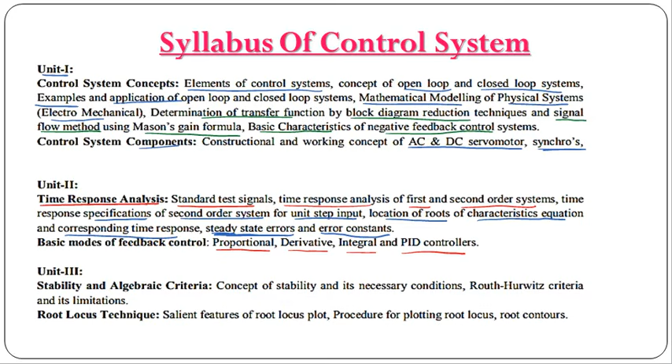And in Unit 3, we will discuss stability and algebraic criteria. So we will see the concept of stability and the necessary conditions. Then we will discuss RH criteria, that is Routh-Hurwitz criteria, and its limitations.

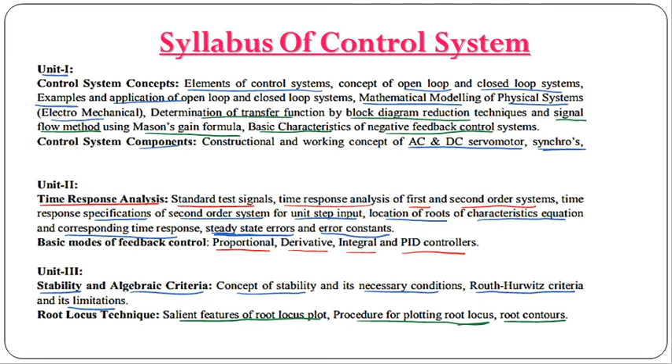And in the B part, we will discuss root locus technique, and we will see some salient features of the root locus plot and the procedure for plotting the root locus, and also discuss root contour. Then in Unit 4 we will see frequency response analysis.

So we will discuss the frequency response analysis from the transfer function model, and we will see the construction of polar and inverse polar plots.

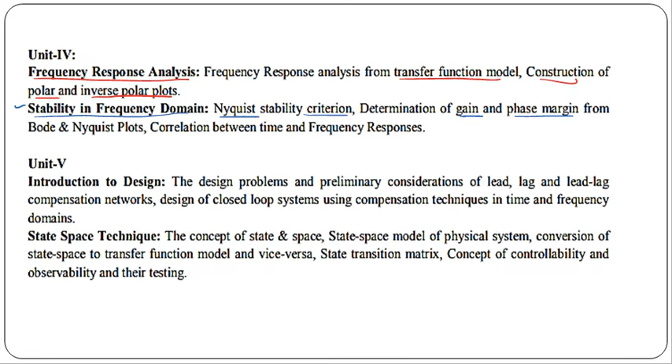And in the B part we will see the stability in the frequency domain. Here we will discuss Nyquist criteria, and we will discuss the gain margin and phase margin calculation from the Bode and Nyquist plot, and also see the relation between the time and frequency response.

And lastly, in Unit 5, we will see some design problems of lead, lag and lead-lag compensation network, and we will design the closed loop system using the compensation technique in the time and frequency domain. And lastly in the B part we will discuss state space technique.

Here we will discuss the concept of state and space. Then we will see the state space model of the physical system, and we will convert the state space to transfer function.

And also if transfer function is given, how to go to state space, we will discuss that. Also we will obtain state transition matrix.

And lastly we will see the concept of controllability and observability and their testing. This was the complete syllabus of Control System.

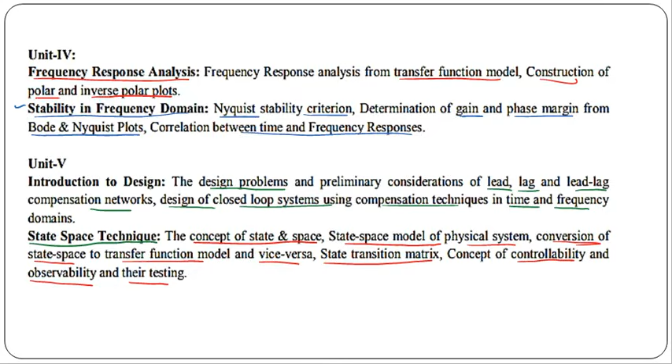First of all, today we will start Unit 1, and we will see what is control system. So control system means by which any quantity of interest is maintained or altered according to a desired manner. It means in the control system we can control the output by varying the input.

So control system is a combination of different elements arranged in a planned manner wherein each element causes an effect to produce a desired output.

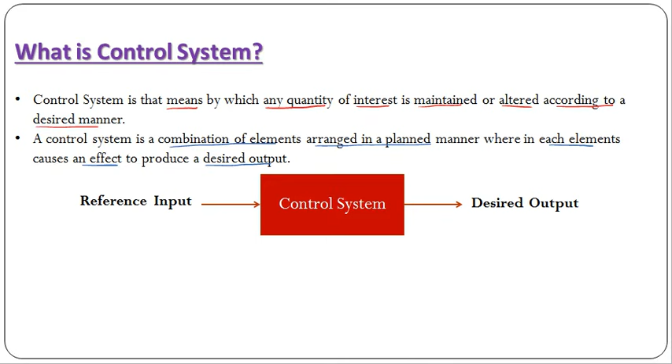Let's understand what is a control system with the help of an example. Let me take the example of a fan. In the system we have a fan, and in the fan we are controlling the output - we can change the speed of the fan. It means we are controlling the output by varying the input. The fan's regulator is varied, which causes the fan's speed to vary. That is, we are controlling the output by varying the input. So that is known as a control system.

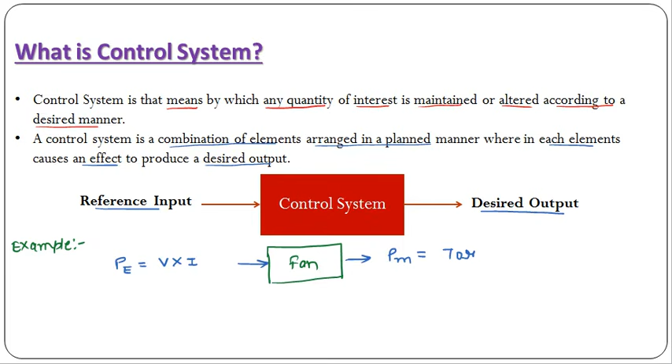In the fan we apply electrical input or electrical power. Electrical power is nothing but the product of voltage and current. In the output we are getting mechanical power, which is torque into speed. When we vary the fan regulator, it means we are varying the current. By varying the current we can control the speed of the fan, controlling the output as per our requirement.

When we vary the regulator's knob, internally the resistance inside the regulator varies. If resistance varies, accordingly current will vary. If current varies, it means the speed of the fan will vary. So we are controlling the output with respect to the input - that is with the help of a control system.

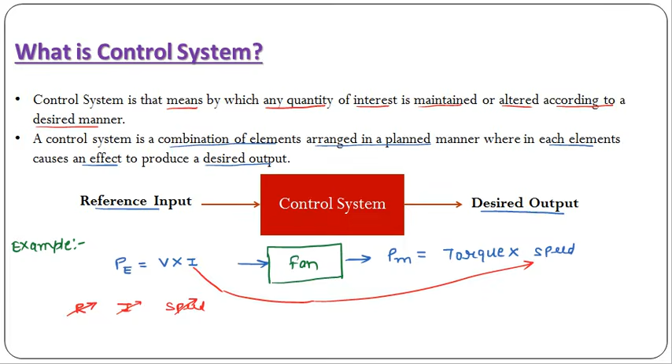Now let us see the elements of a control system.

In a control system, first we apply input. This input is also known as command, or we apply some reference input. So this input has several names - it is also known as command or reference input, it is also known as set point or desired output, meaning the output which we want, which we will apply at the input of this control system.

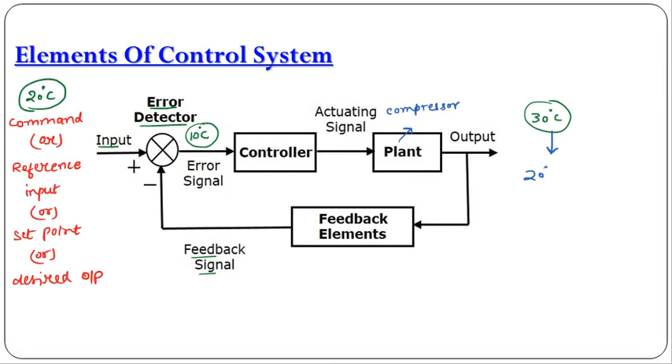Now in the output we will measure the room temperature using the feedback element. In the feedback element we will have sensors and transducers so that we can measure the room temperature, and we will measure the room temperature. This will give the feedback signal. This is the block diagram of a control system.

In a control system there are some representations. The input is represented by R of t, and the controlled output will be represented by C of t. The error signal will be represented by E of t. The actuating signal will be represented by A of t. The feedback signal coming in will be represented by B of t. These are some representations - this is A of t.

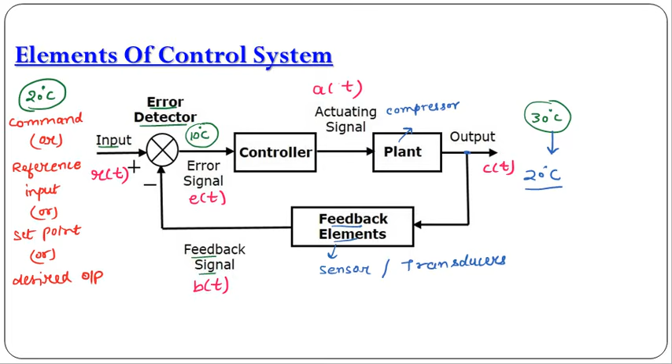Now let us see the types of control system. Control system, depending on the control action, is of two types. First is open loop control system and next type is closed loop control system.

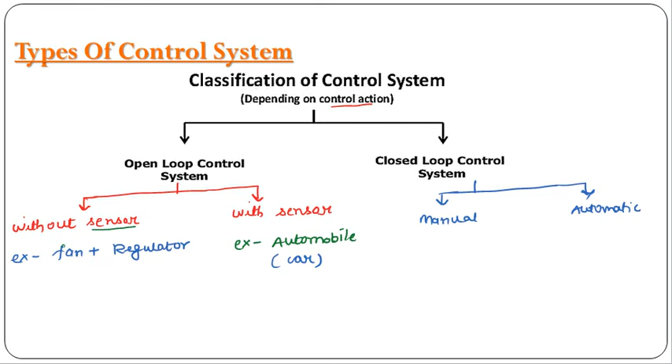And next we have closed loop control system. This is again of two types: first is manual and next is fully automatic. In manual, if we consider automobile plus humans combined together, then it becomes a closed loop control system.

And in the automatic category, examples are like satellite. Satellite is a fully controlled or fully automatic closed loop control system. Then we have some examples like missile, radioactive plants, and voltage stabilizer. These are a few examples of closed loop control system.

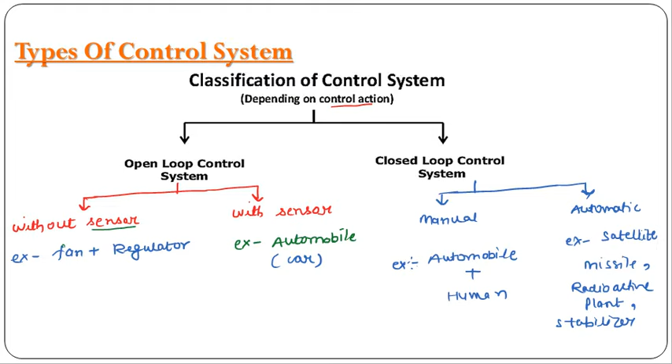Now let us discuss both these control systems one by one. So first we will discuss closed loop control system. In this, the changes in the output are measured, because closed loop control system is also known as feedback control system, since feedback is present in this control system.

So in this, the changes in the output are measured using the feedback element and they are compared with the input or set point given. For example, in the case of AC, if you are giving the input as 20 degree centigrade, it will compare the output with the input and set point to achieve the control objective. This feedback means measurement, so we are measuring the output. Feedback elements are measuring elements which are sensors and transducers in the automatic control system.

So this is the block diagram of a closed loop control system. Here we apply input. This is the error detector or summing point. It will produce an error signal by comparing input and the feedback signal. Then it will give the command to the controller. The controller will produce an actuating signal and then the plant will work.

So it will give the controlled output. Now the controlled output is given to the feedback element, so it will measure the output and then give it to the error detector. This controller and plant together is known as the forward path.

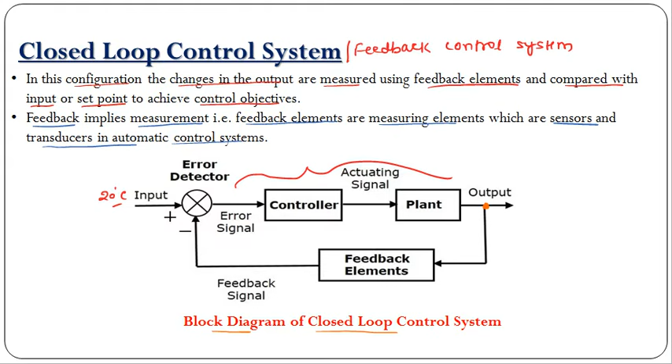So controller and plant together are known as the forward path, and the gain of this path is denoted by G of S. And this feedback element is known as the feedback path, and the gain of this path is denoted by H of S.

Input is R of S and controlled output is C of S. The error signal is represented by E of S, and the feedback signal is represented by B of S.

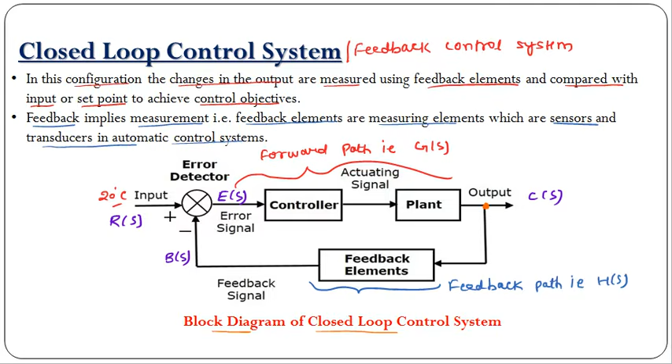Now let us see the control canonical form. In the closed loop control system we discussed, we have G of S, that is the forward path gain, and H of S is the feedback path gain, connected to the error detector. We can represent this in a form known as the control canonical form. The feedback that comes in can be of two types: negative feedback and positive feedback.

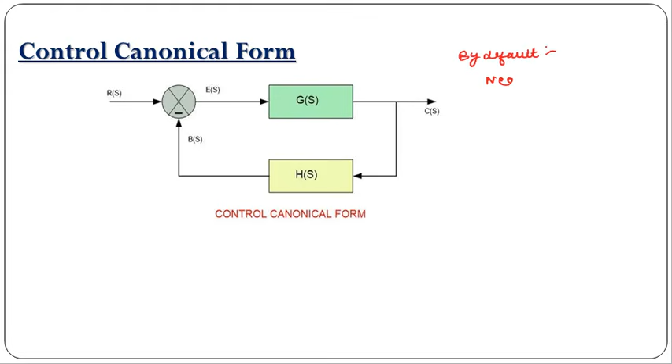By default, the feedback we consider is negative feedback. If nothing is mentioned in the question, then by default negative feedback is considered, because in negative feedback the stability is more compared to positive feedback, and the control system is considered as a closed loop control system.

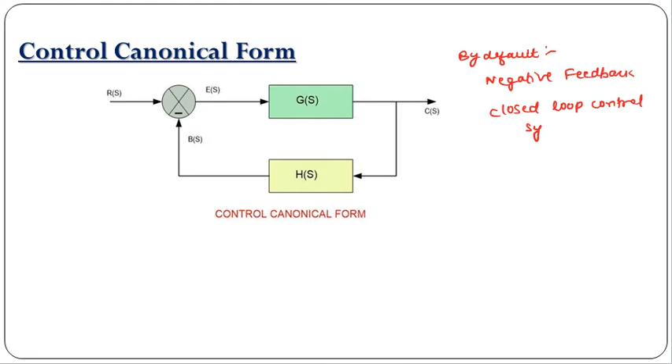So now in this control canonical form we have negative feedback. Negative feedback means this R of t input and the feedback signal B of t will be out of phase by 180 degrees, whereas if it is positive feedback, R of t and B of t will be in phase.

If we have a control canonical form, how do we obtain its transfer function? Transfer function is given by the Laplace transform of output by the Laplace transform of input, assuming the initial conditions to be zero. Here the output is C of S and input is R of S. So we have to obtain the ratio of C of S by R of S, which gives the transfer function of this closed loop control system.

Now, the error E of S is the difference between the input R of S and the feedback signal B of S. So error E of S is given by the difference between R of S and B of S.

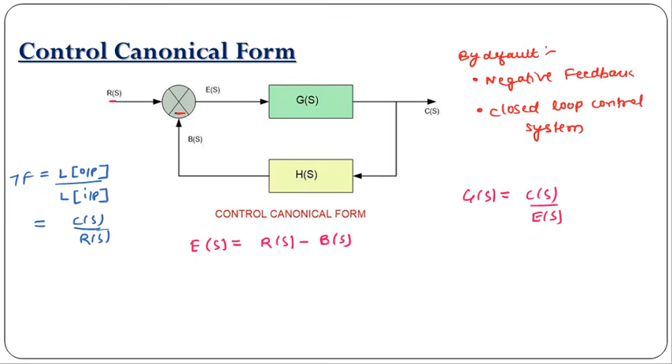Similarly we can write B of S as follows: H of S is the feedback path gain, its output is B of S, and for this block the feedback path input is C of S. From here if we calculate B of S, it will be given by C of S into H of S.

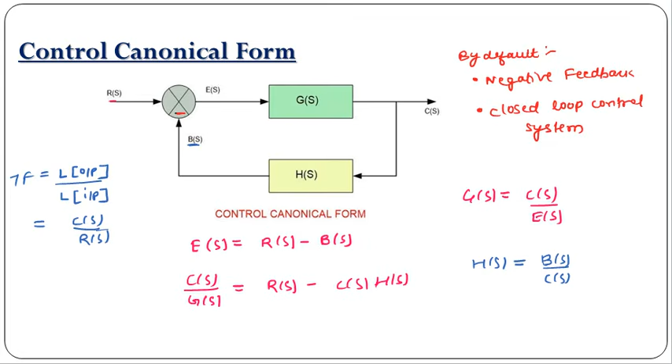If we cross multiply this with G of S, we get C of S equal to R of S into G of S minus C of S H of S into G of S. Now let us write C of S equal to R of S into G of S minus C of S H of S into G of S. If we take the C of S term on the left hand side and take C of S common, we get 1 plus G of S into H of S.

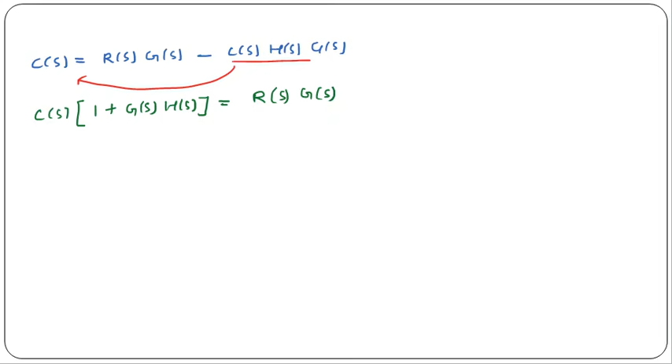This will be equal to R of S into G of S. So what is the transfer function? Transfer function is given by the ratio of the Laplace transform of output, C of S, by the Laplace transform of input, R of S. If we find the C of S by R of S ratio from here, we get G of S divided by 1 plus G of S into H of S.

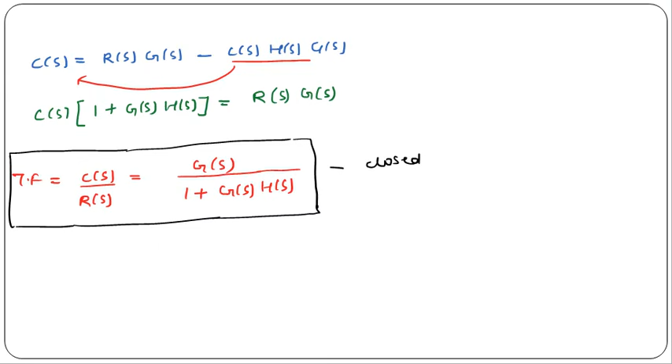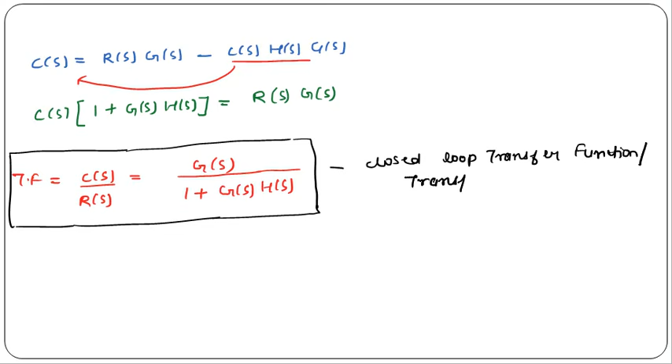This transfer function is known as closed loop transfer function, or it is also known as transfer function only. In short, you can write it as CLTF. It indicates closed loop transfer function, which is also known as transfer function.

Here you observe that we are getting a plus sign. By default, our closed loop control system is with negative feedback. So if it is negative feedback, then you will get this plus sign. This is for negative feedback.

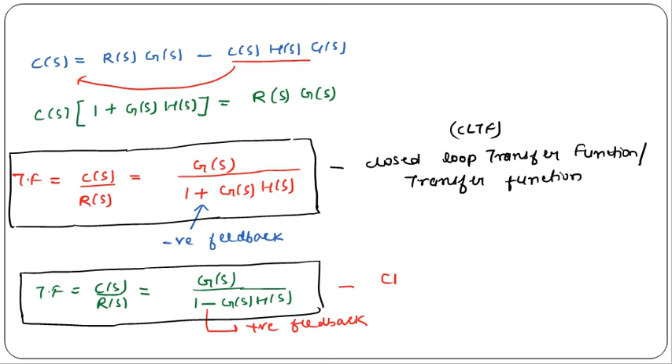And if you are having a positive feedback closed loop control system, then your transfer function C of S by R of S will be equal to G of S by 1 minus G of S into H of S. It means the opposite sign will come. So if it is negative feedback, you will get a plus sign, and if it is positive feedback, you will get a negative sign. This negative sign is for positive feedback, and this is the closed loop transfer function.

Now let us discuss open loop control system. Open loop control systems are known as conditional control systems, formulated under the condition that the system is not subjected to any type of disturbance, including the input.

Open loop control systems are known as conditional control systems because if an open loop control system has to be stable, there should not be any disturbance, because if any disturbance occurs in an open loop control system, the system will remain unstable. Also, we should not change the input because there is no feedback mechanism in open loop control systems. So if any disturbance or variation occurs, it will not be able to minimize that variation. That is why it is known as a conditional control system.

In this configuration, the feedback or the measurement is not connected to the forward path or the controller. In an open loop control system, the feedback path or sensor may or may not be present. If present, it will not be connected to the forward path or controller, meaning it will not be connected to the error detector. That is why it is known as open loop control system.

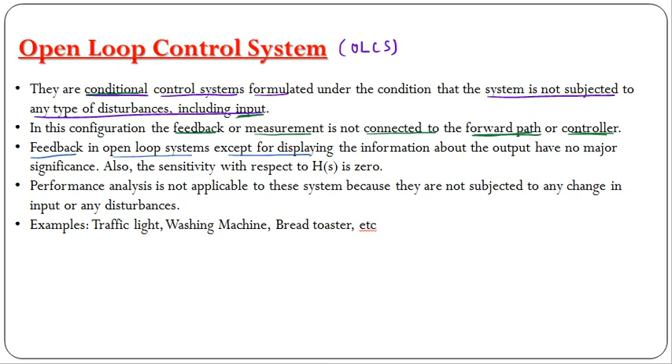Feedback in the open loop system, except for displaying information about the output, has no major significance. Since the feedback is not connected to the forward path, we only use that feedback path to display the value of the output.

Also, the sensitivity with respect to H of S is 0. I will discuss this sensitivity topic in the next lecture. In an open loop control system, if any disturbance or variation comes in the feedback path, its sensitivity will be 0. It means there will be no impact on the output if there is a disturbance in the feedback path element, that is, in H of S.

But if a disturbance occurs in the forward path G of S, it will have 100% impact on the output.

The next point is that performance analysis is not applicable to these systems because they are not subjected to any change in the input or any disturbance. In an open loop control system, we cannot perform performance analysis, because to perform analysis we would need to either change the input or introduce some kind of disturbance. But open loop control systems are conditional control systems, so the condition is that no input should vary and no disturbance should occur. That is why performance analysis is not possible in the open loop control system.

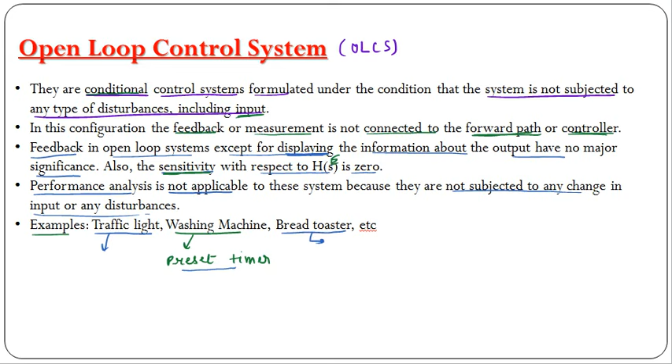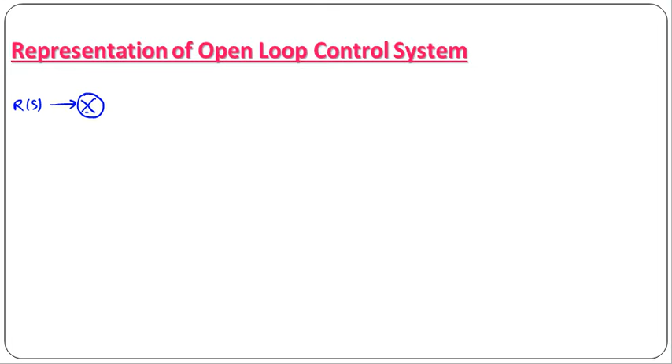Now let us see the representation of open loop control system. First we have the input R of S, given to the error detector. Suppose we have negative feedback, then it will produce some error signal E of S, which is given to the forward path G of S, and then we have the controlled output C of S. So suppose this open loop control system has feedback, with feedback path element H of S. Feedback is present, but it will not be connected to this forward path, so there is no connection, and this is B of S. This is the representation of open loop control system.

Here whether it is negative feedback or positive feedback, it does not matter, because it is not connected. So now this can be further simplified: since no signal is coming from here, this R of S and this error E of S will be equal, because they are connected in series and no signal is coming from there, so input and error will be equal.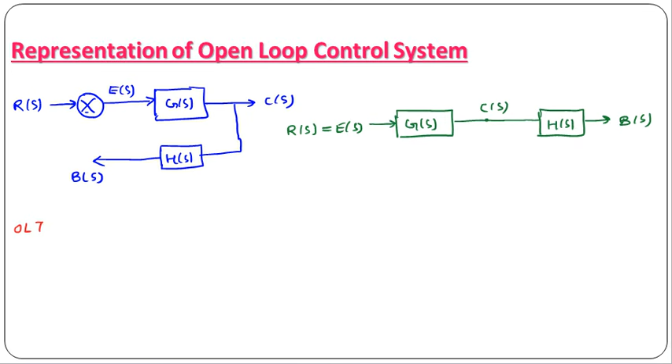Now if we calculate the transfer function of this open loop control system, that is the open loop transfer function, then output is B of S and input is R of S, which is also equal to E of S. So now as both blocks, G of S and H of S, are connected in series or cascading, the transfer function will be given by G of S into H of S. This is the open loop transfer function.

This open loop transfer function is also known as loop transfer function. You have to remember this formula: open loop transfer function is given by G of S into H of S. And the closed loop transfer function, that is C of S by R of S, is given by the formula G of S divided by 1 plus G of S into H of S. The plus sign is for the negative feedback. This is the closed loop transfer function, also known as transfer function. You have to remember these two formulas.

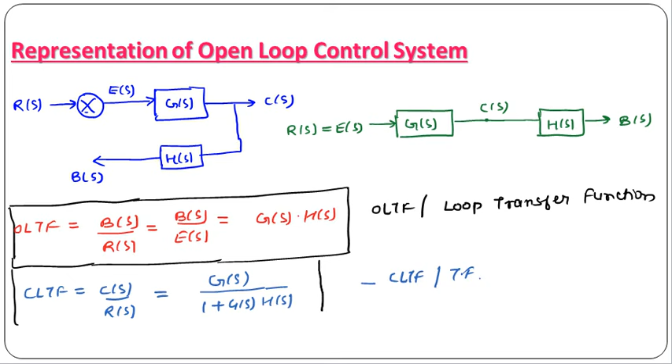Now next we will see the difference between the open loop and the closed loop control system. This is the block diagram representation of open loop control system. Input is R of S and we are getting output B of S. Here the open loop transfer function is given by B of S by R of S, which will be equal to B of S by E of S, which is equal to G of S into H of S. So in this case no feedback is considered.

Similarly this is the block diagram representation of the closed loop control system, and here feedback is present. So for that, the closed loop transfer function C of S by R of S is given by G of S by 1 plus G of S into H of S, because here negative feedback is there, so plus sign will come.

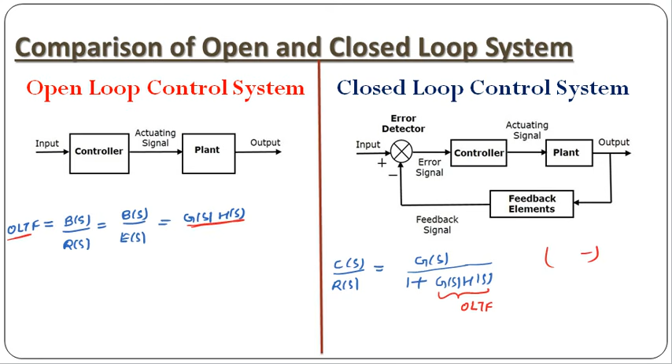So this is the closed loop transfer function. If you see both these formulas, the open loop transfer function is given by G(S) into H(S). This open loop transfer function is also present in the closed loop transfer function. The denominator of the closed loop transfer function is 1 plus G(S) into H(S), so this G(S) into H(S) is nothing but the open loop transfer function. Let me write the closed loop transfer function clearly.

Next difference: the behavior of the open loop system does not change even though its output changes, hence the open loop system is not accurate. This is because in an open loop control system there is no feedback, so even if the output changes, it will not affect the behavior of the system. That is why open loop control system is not accurate. Whereas the behavior of the closed loop control system will change. If the output changes, the value of the error will change accordingly, which gives a command to the controller, and because of that the behavior of the closed loop control system changes. So we can see that closed loop control system is more accurate.

Next point: the open loop control system may or may not have a sensor. But in case of closed loop control system, a sensor will compulsorily be present in the feedback path. Next point is the time constant of the open loop control system is larger.

A larger time constant means that if there is any transient or disturbance in the system, it will take a larger time to die out. So time constant being more means it will take more time, meaning the speed is slow. That is why the open loop control system is slower, whereas the time constant of the closed loop control system is smaller. If the time taken is less, it means the transient will die out quickly, meaning the speed is fast. This is the third point.

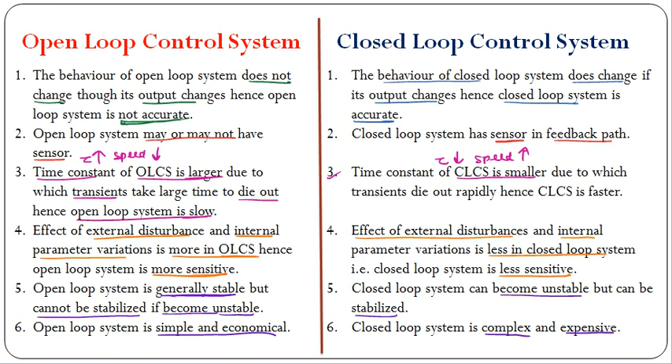Further, closed loop control system is of two types: first is negative feedback and next is positive feedback. We will cover the difference between negative feedback and positive feedback in the next lecture.